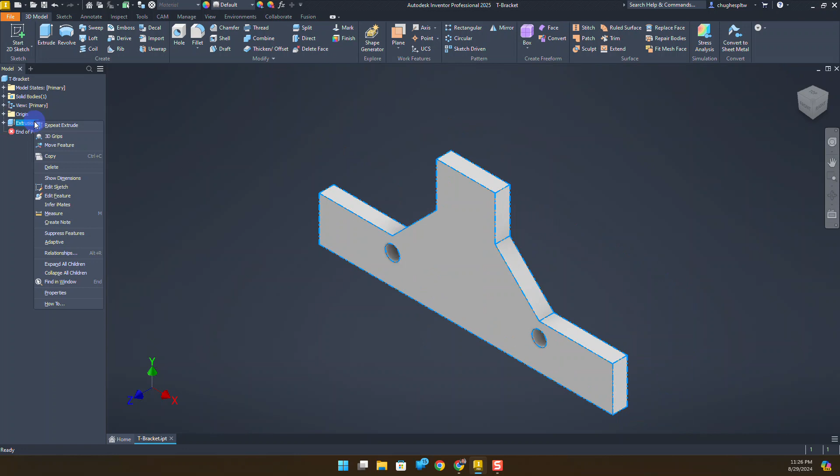As we do so, we're going to go over to extrusion 1. If I select the plus sign, I can see extrusion 1 consume the sketch in either one of two ways. I can right click on the sketch to select edit sketch, or if I have it collapsed on extrusion 1, I can always right click and select edit sketch from there too.

So here we're going to make a change for the base dimension to go from 100 millimeters to 125. You can kind of predict what's going to happen is now that's going to make that base wider.

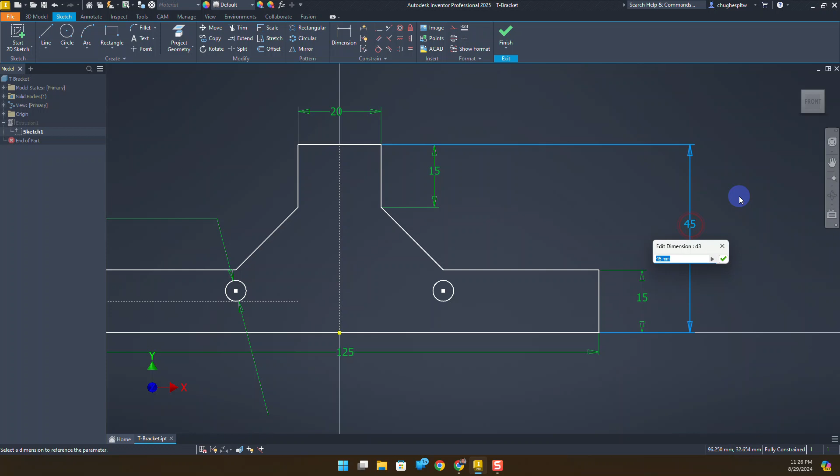And they say, what if we change that overall vertical dimension from 45 to 60? So if I change that to 60, you're going to see how that affects some of the other geometry. If I change it to 80, you're going to see it definitely affects a lot of the geometry here. We don't get very much of a line for our base component. I'm going to change this back to 45.

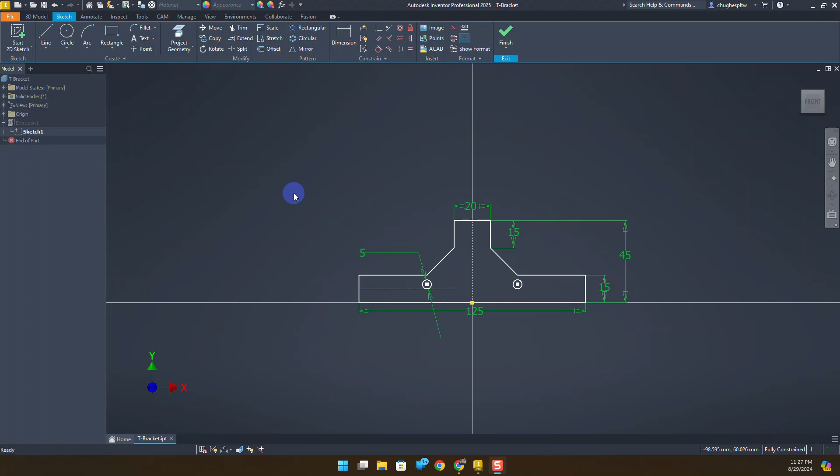Once we change that back to 45 millimeters, what they would like us to do is have it where lines 5 and 7, which are these vertical lines up here, that when they get longer, everything else stays the same. So the one thing we end up doing to change that is right clicking on this 15 millimeter measurement, and I want to go ahead and delete that.

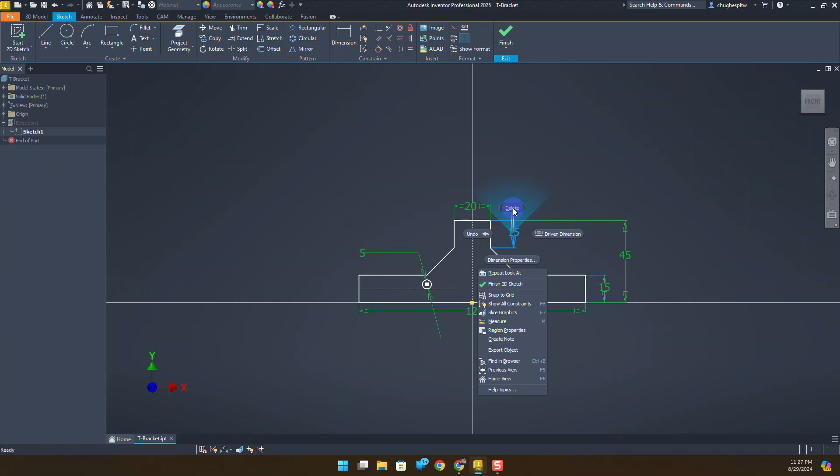And now if I change this from 45 to 100, you're going to notice this is what only these lines get longer as they kind of go from there.

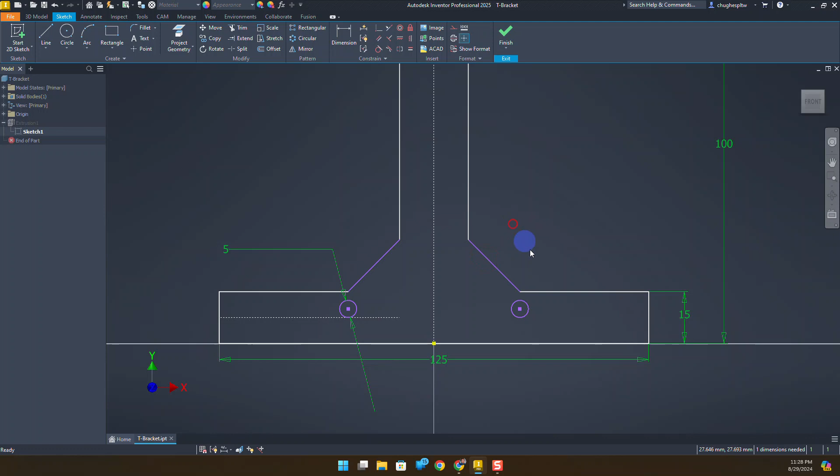So some things that we may need to take a look at is like, okay, we need one dimension still here, and look at how the sketch is going to behave. So we know that if I move this, that looks good. It's also dependent upon this little portion here too, though.

So what we might do is throw a dimensional constraint on this line right here. Again, you don't want to be on a green dot. I want to be on this line. And maybe I change this to 25 millimeters. That'll kind of give us a size there.

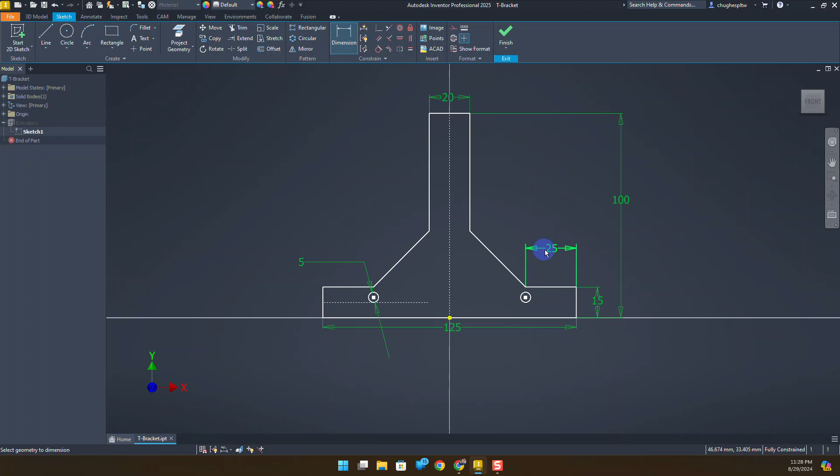I can also change it to a different value. Let's go to 35. 35 looks pretty good. I can go ahead and select Finish Sketch. And what you'll notice is that as soon as I finish the sketch, that sketch and extrusion updated with one another.

Because they're tied together, we can go ahead and see that that's going to be the final component in this particular part. And if we make any other changes, we could go ahead and see that. So that's part of the design intent, being able to take a look at, if I go back into the sketch and make a change, how does it change some of the other features?

You can see if I change that base, you can see how it affects some of the other items. If I change this to 25, how does that kind of impact that? And so how does that kind of work?

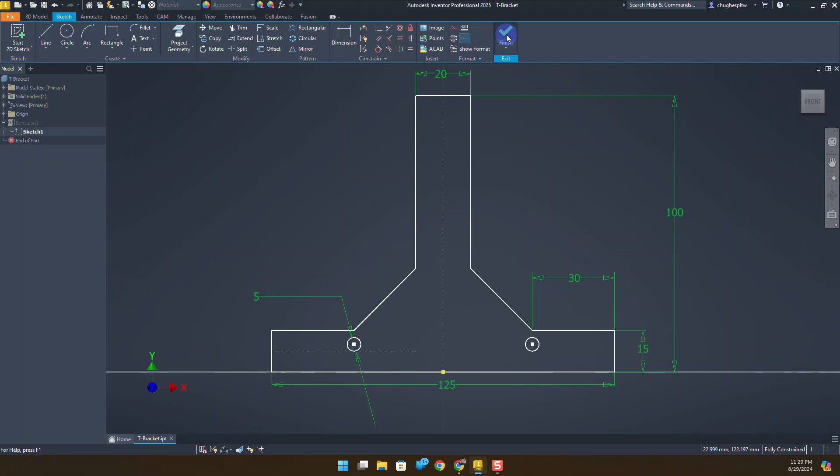So I'm going to change this back to 125. And again, we can always go even to a smaller increment, maybe 30. Finish the sketch, and that'll go ahead and you can see that updating as well.

So it just depends on what you're working with and what your design intent for a lot of your values are. You can make those changes and be able to quickly make some edits and have that be part of your design. This finishes out activity 1.3.3, constraining a sketch.